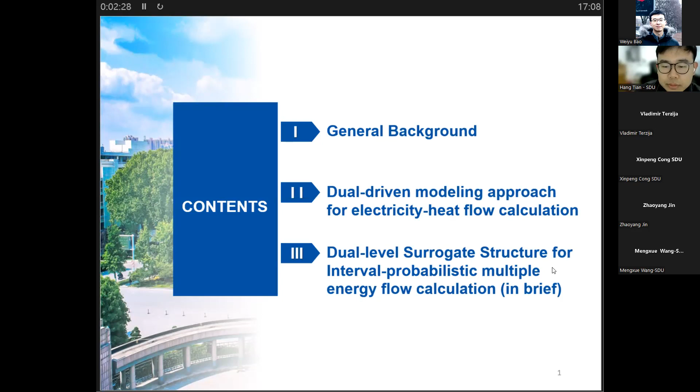This figure shows multiple energy flows in an integrated energy system, namely IES. The energy flows first come from fossil fuels like coal or gas, and renewables like hydro, wind, and solar power. Energy flows then go through networks like pipelines, the power grid, or heat and cold distribution. They also pass through energy conversion equipment and may transform into another type of energy. Finally, energy flows go to the terminal demand of heat, cold, gas, and electricity. The IES aims to break down barriers between traditional isolated energy systems and boost overall efficiency.

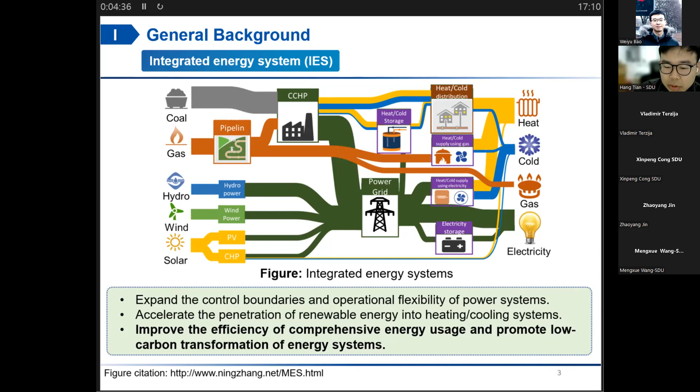This figure shows a more detailed illustration of how multiple energy flows, namely MEF, connect devices and different networks. To properly operate and control such a complicated IES, the acquisition or forecasting of network states like bus voltage, water temperature, or gas pressure provides critical information for both decision makers and the automated controllers integrated in the system. This can be realized by the calculation of MEF.

In the second part of this presentation, we will focus on data-driven MEF modeling. And in the third part, MEF calculation considering uncertainties will be introduced briefly.

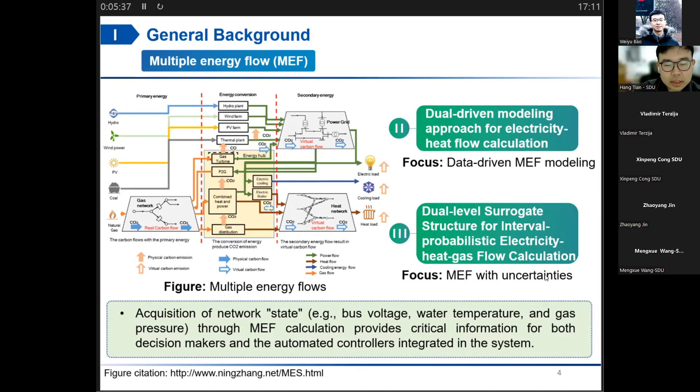In the following slides, I'm going to introduce some current challenges in MEF calculation. With the lack of fossil fuels and high penetration of renewables in IES, the nodal energy injection is subject to large amplitude, wide area, and high frequency fluctuation. Therefore, the MEF state is evolving faster and more complicated. However, the traditional MEF calculation based on physical model is time-consuming, since it's based on iterative solution of implicit nonlinear equations. Therefore, the MEF calculation method with high accuracy and high speed are urgently needed to realize the rapid perception of and online regulation of MEF state.

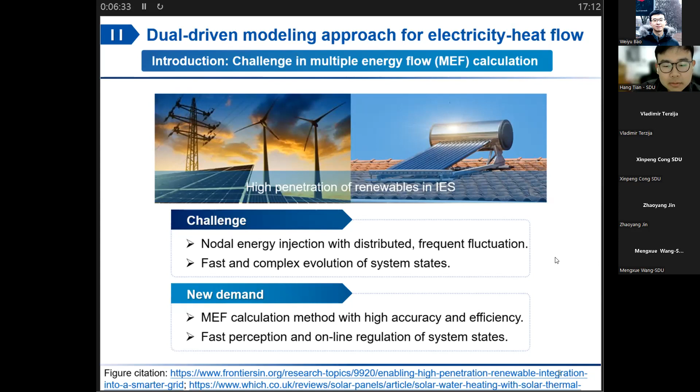As we can see in the equations on the left-hand side, the essence of MEF calculation is to solve nonlinear energy balance equations, which is similar to the form of power flow calculation. MEF calculation is an essential component to support planning, operation, control, and safety evaluation of an IES.

Newton-Raphson method, which is illustrated in the figure on the right side, is the most commonly used calculation method in power system and MEF at present. The core idea of this method is to transform the solution of nonlinear energy flow equations into the solutions of linear correction equations by successive linearization. Its advantage is that the number of iterations is basically independent of the scale of the network.

However, the modified equation needs to be reformed and calculated in the process of each iteration, resulting in long computing time. In addition, the convergence reliability of the algorithm depends on a good initial value. If the initial value is not chosen properly, the algorithm may not converge or converge to a solution point that cannot be run.

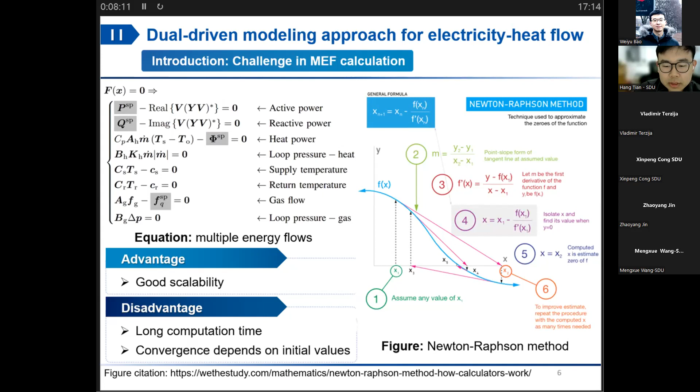To sum up, the first challenge is to find a non-iterative method to calculate MEF efficiently.

In recent years, with the wide development of measurement devices in electrical heating systems or other types of energy networks, the acquisition of history and real-time measurement data is getting much easier. The development of data-driven MEF calculation and analysis provides an effective way to overcome the problems of inaccurate parameters, time-consuming iterative calculation, and unguaranteed convergence.

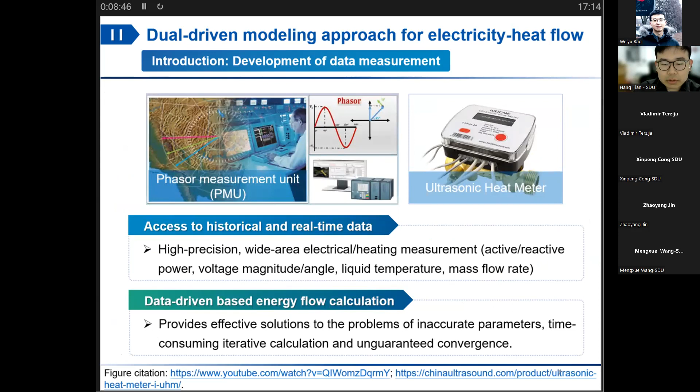Before introducing our proposed method, I'm going to talk about the data availability issue. Due to the consideration of independence, security, and privacy of the system from the operators, it is not easy to obtain a large number of snapshots from the two networks simultaneously. Therefore, the measurement data is currently not considered in this work.

As an alternative, like most related literature do, we choose to use simulation data, which is generated from iterative calculation. The difference between simulation-based data-driven and measurement-based data-driven is that the former one can still approximate and accelerate the calculation of original model, but it is incapable of dealing with the problem of inaccurate parameters.

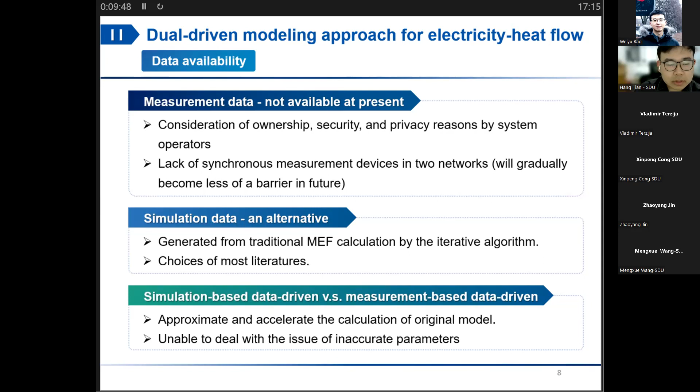The mechanism-driven approaches are denoted in the red color, and the data-driven approaches are denoted in the blue color. Now I would like to introduce the function of each module. The data preprocessing module aims to find the key features through mechanism analysis and remove questionable data.

However, in the 500 samples of calculation, it is found that in parts of this case, the limit violation exists in the nodal temperature, which is illustrated in the figure on the left-hand side. This violation can significantly affect nodal temperature, resulting in non-convergence.

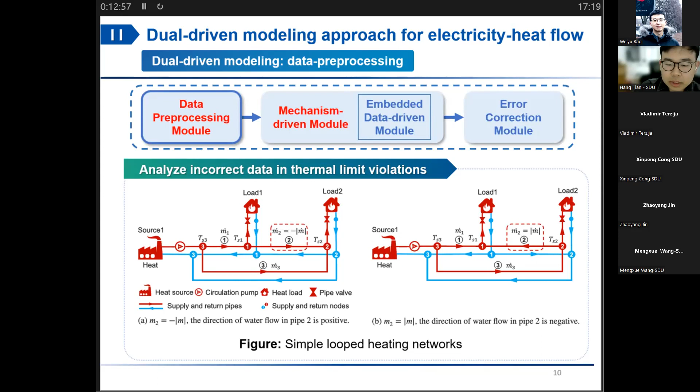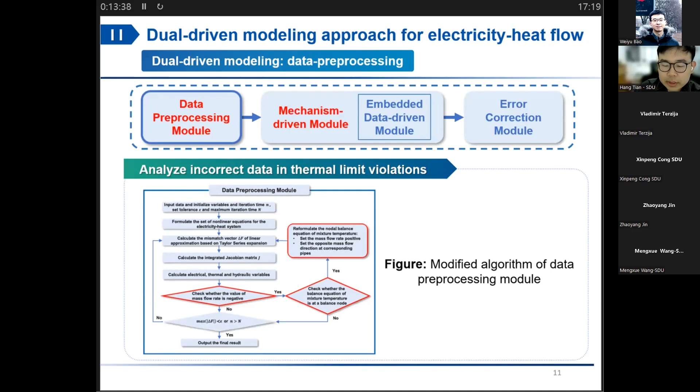To fix this problem, model reformulation is difficult since it involves more complicated mathematical problems. Therefore, we focus on customizing the algorithm. Two decision procedures are added to the iterative process of the Newton method, as illustrated in the figure. One is to check whether the mass flow rate is negative, and the other is to check whether the connecting node is a balanced node. If both are true, the nodal balance equation will be reformulated, and then we can avoid the errors in calculation.

In order to provide basic linear models for the electricity heat system, nonlinear electrical and thermal equations are linearized based on a reasonable mechanism-driven simplification and an embedded data-driven linearization. The mechanism-driven model uses linearized electrical and thermal models as fundamental components of this dual-driven model.

In the electrical network, the classical DC power flow equations are used with the assumptions of low active power losses, low resistance over reactance ratio for transmission lines, negligible voltage angle differences, and voltage magnitude close to 1 per unit.

In the heating network, the heat loss is not considered since it is relatively minor, approximately less than 4% in this case. The heat transfer equation and nodal heat balance equation are linearized based on this assumption.

For the hydraulic equations, due to significant nonlinear characteristics, it is challenging to linearize them via mechanism-driven simplification. Ignoring the hydraulic equations may violate the loop pressure balance, leading to inaccurate mass flow rates, especially for meshed heating networks. Therefore, partial least square regression is used to extract the underlying linear relationship in hydraulic equations.

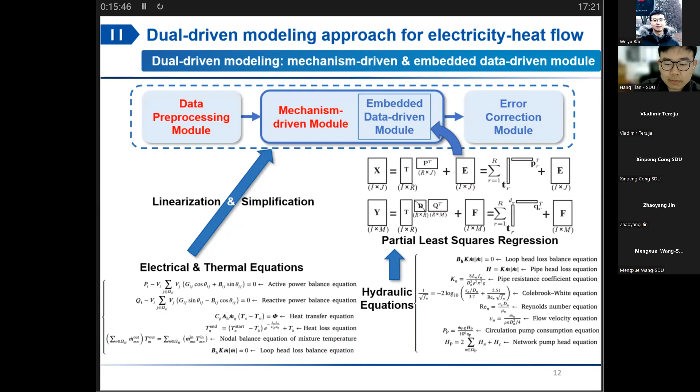These two modules provide a fast physics-guided calculation, but with unavoidable inaccuracy. At last, in the error correction module, a linear model is obtained from the regression of linearization error and further integrated with the previous linear models to improve the overall accuracy.

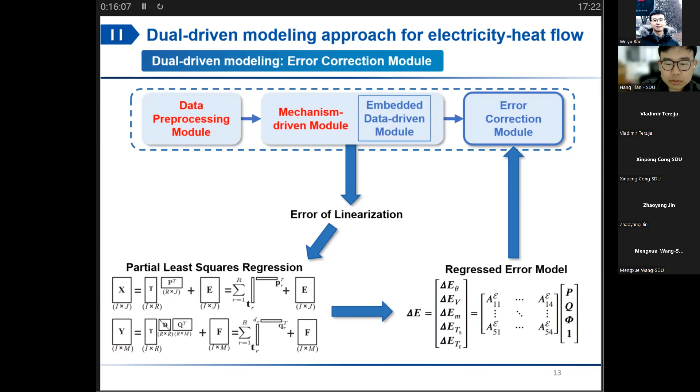Now we are in the case study section.

Meanwhile, the calculation of electrical variables is significantly more accurate than that of the thermal and hydraulic variables, which implies a higher degree of linear relationship between the input and output variables.

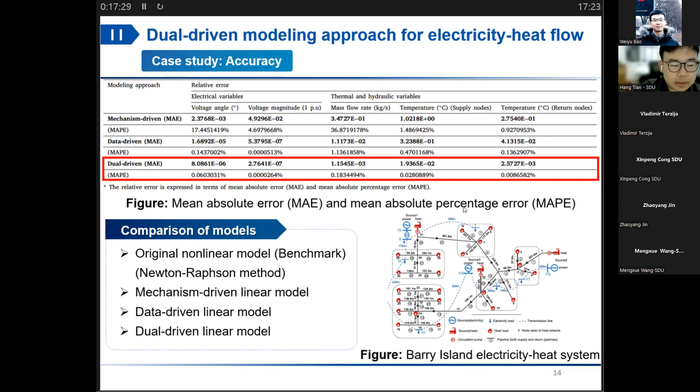As we can see in the figure, the error distribution of the dual-driven approach is significantly narrower and more to the left than that of the data-driven approach, which proves that the dual-driven approach has improved the accuracy. In addition, the accuracy of thermal and hydraulic variables is improved more significantly than that of electrical variables.

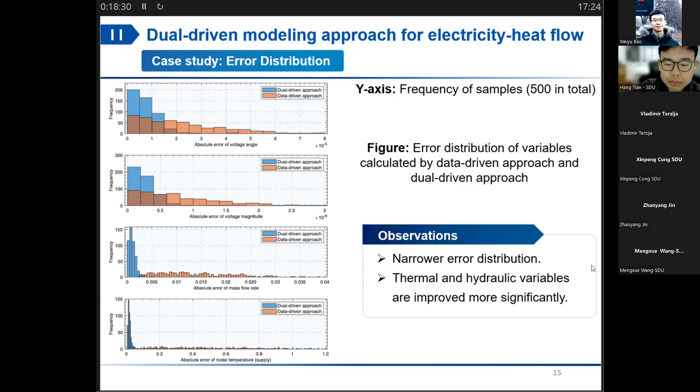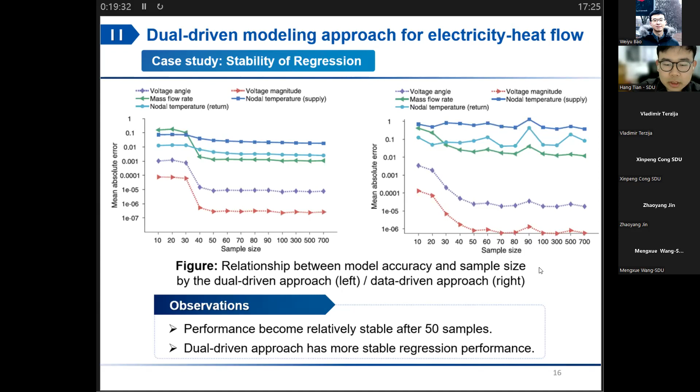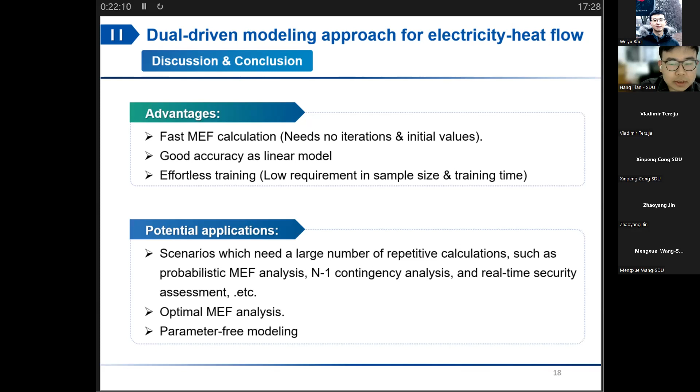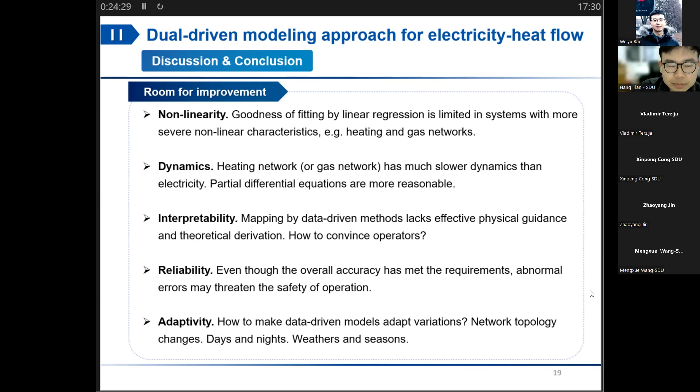Okay, now let's move to the third part. In this part, I will give a brief introduction of our recent work on a dual-level surrogate structure for solving the interval probabilistic MEF problem.

The integration of electricity, heat, and gas involves abundant uncertainties, such as gas/water condition, the pipeline or transmission line properties, coefficients of equipment, surroundings, and so on, all with varying degrees of precision in their mathematical description due to different data richness in the real engineering circumstances.

Therefore, the interval probabilistic description gives more flexibility to describe the uncertainty. Therefore, it is of particular interest in an IES context because it provides appropriate models that include various sources of uncertainty.

Without presenting unwarranted conclusions. When dealing with IPEF, since existing analytical methods are easily caught in a quandary among accuracy, efficiency, and scope of applicability, we propose a dual-level surrogate structure to deal with this problem.

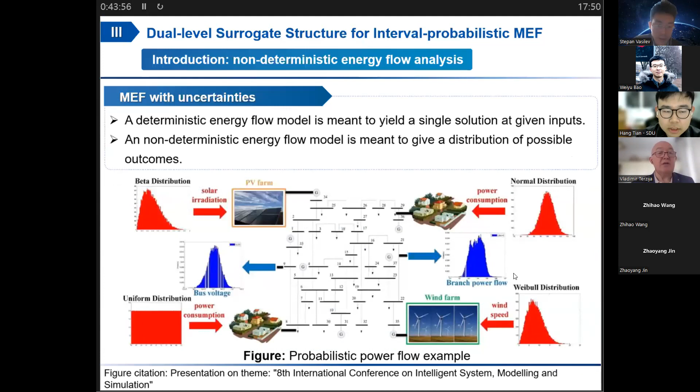Yes, that's clear, but my question was about your 21st slide. Can you go back to it? Sorry, what slide? 21st slide please, slide number 21. Okay, can you share your screen and go to slide number 21? Yes, great, thank you. This one, right? Yes, okay.

I asked about MAPE metrics, I mean the seventh one, of MAPE of lower/upper boundaries. I asked about this, and why you chose these metrics instead of other metrics.

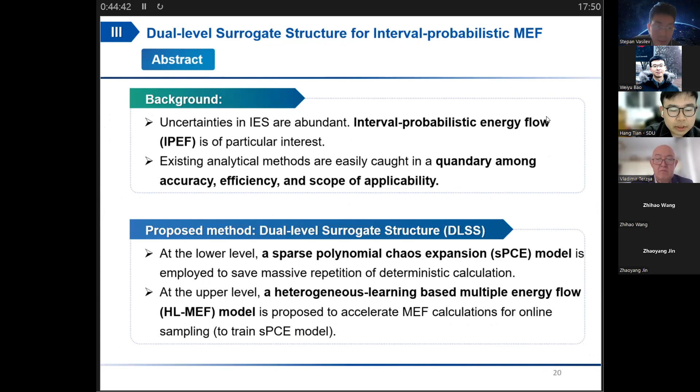When the uncertainty is precise and deterministic, it is a deterministic energy flow problem, and when the uncertainty is probabilistic, it is actually a probabilistic energy flow problem. There are also interval energy flow problems. In this work, we consider the situation of both imprecise and probabilistic uncertainties, so this problem becomes an interval probabilistic energy flow problem.

So the uncertain input will be a probability box, in that shape. That box is composed of two CDFs, cumulative distribution functions. So the input is a CDF, the output is also a CDF, and in that box any distribution is possible.

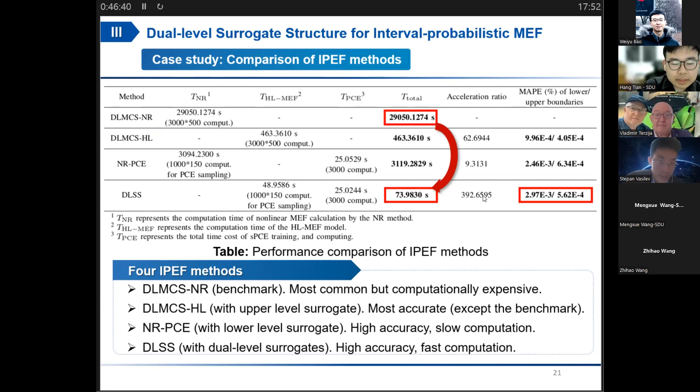So back to this table, we choose the MAPE of the boundaries. It means the boundaries of this probability box, the accuracy of the box boundaries. Okay, does that make sense?

Stepan, was it? Can you hear me? Yes, now we can hear you. Yes. Yes, it was clear, thank you very much. Okay, brilliant, thank you for this discussion.

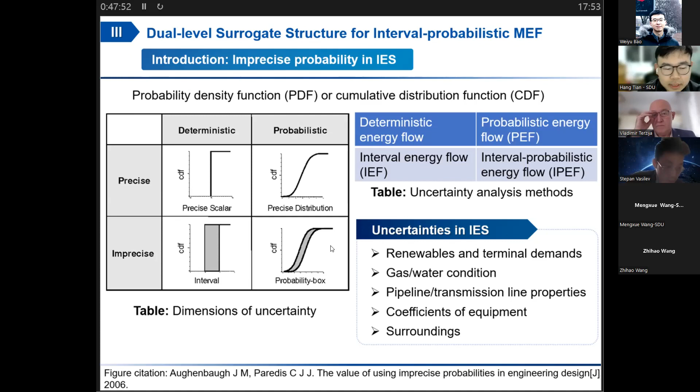Let me use this opportunity to ask my own question, which will go beyond these fine details. I'd like, Hang, to ask you: what is the reason for integration of different energy systems? The reason of integration of multiple energy systems - one reason is that, okay, I'll show my slide.

Another reason is that the heating and cooling system, and also the natural gas system, have relatively slow dynamics, and we can store the gas or hot water in their pipelines. It's kind of a storage. So if it is connected with the power system, we may utilize this storage applicability.